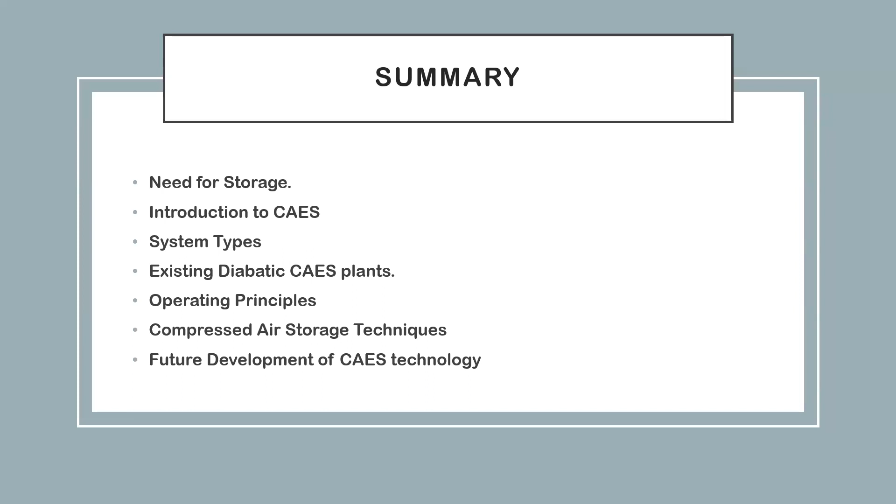We just mentioned the essential things about the concept of compressed air energy storage, its types and technology. So first, we will talk about the need for storage. We know that there is economical growth, and in order to keep this growth without affecting the environment, we need to search for solutions, either reducing consumption, increasing efficiency of the energy already used, or switching to clean energy.

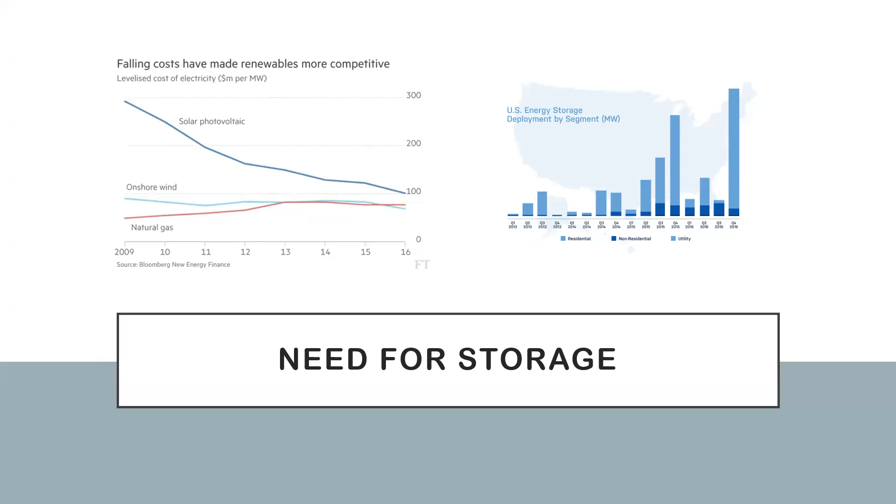And this clean energy is intermittent. The renewable energy solutions are intermittent, so we need to combine energy storage with them in order to have stable energy when there is demand. A lot of energy storage techniques are available: batteries, different types of batteries, pumped hydro storage, compressed air, which is our topic for today, flow batteries, and supercapacitors, which is a hot topic for research today.

Okay, first we passed this slide. Why storage? Why do we need storage? First, because it provides electricity at short notice, so it has a fast response for the energy need. Instead of waiting for other sources to provide electricity, we can control the frequency using the storage. We can use peak shaving and something called the black start effect. It's related to load management and reducing the fluctuation of the load.

For sure, overcoming the intermittent nature of renewable sources, and it's backup power for emergency. So what's compressed air energy storage? It's a technology that works like all thermodynamic cycles, by using compressors to compress air and then expansion in the turbine, using a heat sink and heat source.

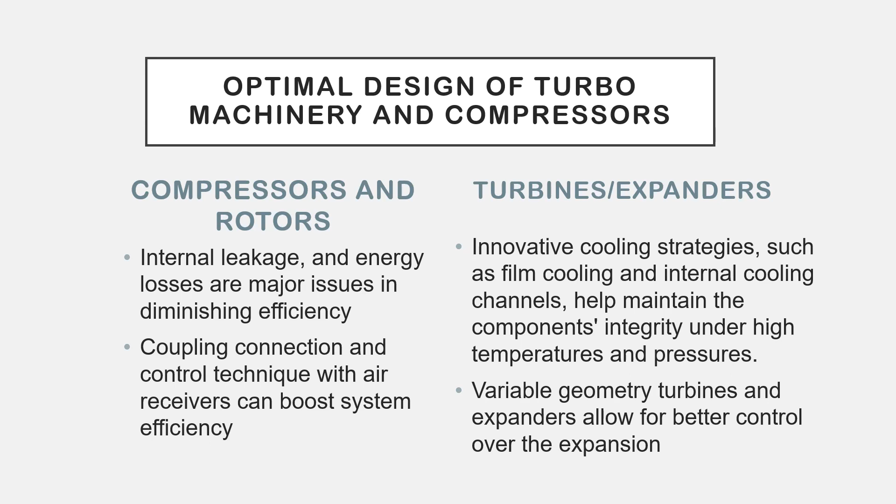Now, for turbines and expanders, there are advanced cooling techniques, which is the second slide. Research may focus on novel cooling methods to manage the high temperatures generated during expansion, improving overall system efficiency. Also, we can use variable geometry expanders, which allow for optimization under varying load conditions and operating parameters. And that's it for rotors and expanders.

Okay, another technique that can improve the efficiency of the compressed air energy storage is dealing with the thermal energy storage. We know that during the heat recovery and heat exchange, a lot of heat will be lost, and the process is not ideal or isentropic. So a solution that we can suggest here is to use the PCM, the phase change material. Maybe we didn't study this process, it's just a suggestion, inside the tanks. So when heat enters with very high pressure and temperature, this material will store the heat and give it again to the air before the expansion process. This will increase the efficiency, as approximately 92 to 93% of the heat will be delivered and exchanged through the air. And we can for sure use other techniques, like the types of rocks where the air will be stored, depending on the physical and chemical properties of the material.

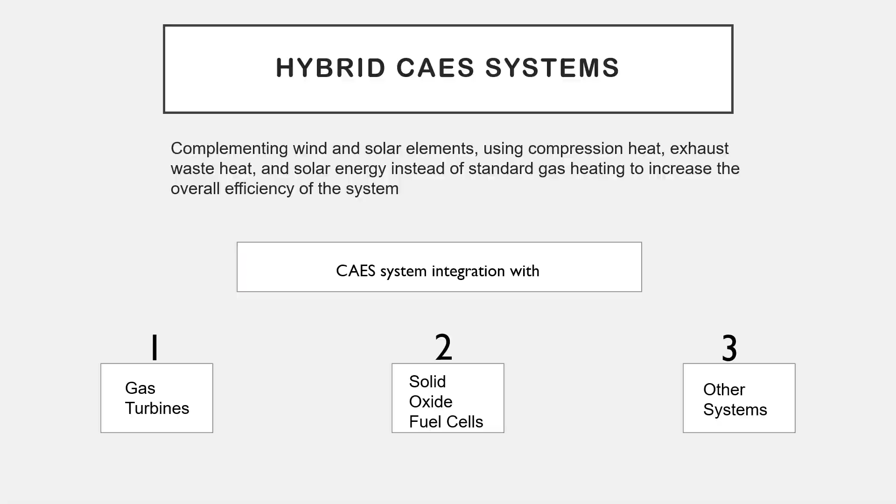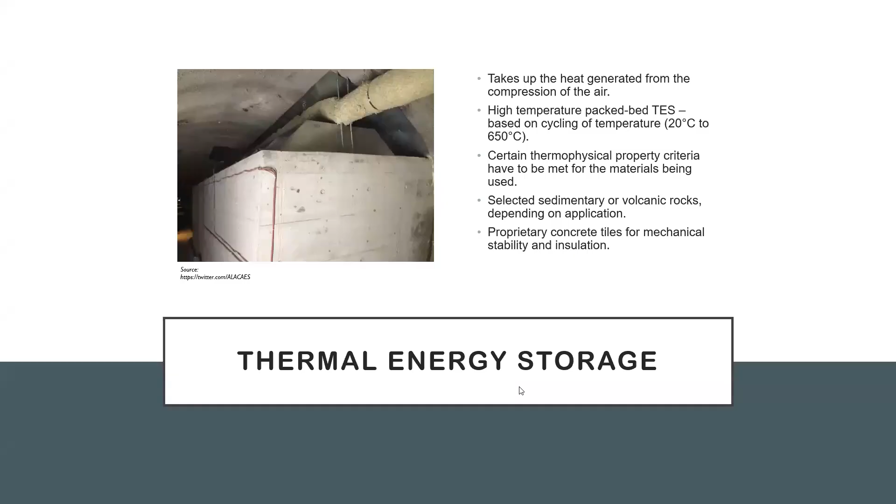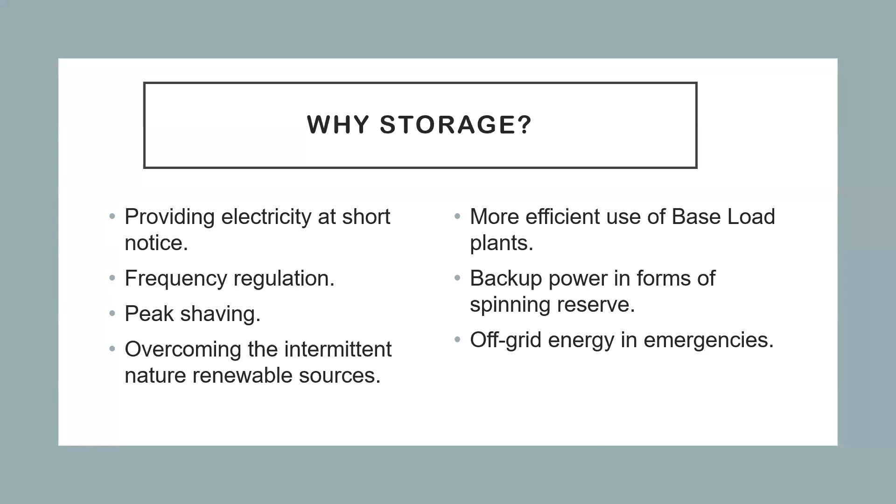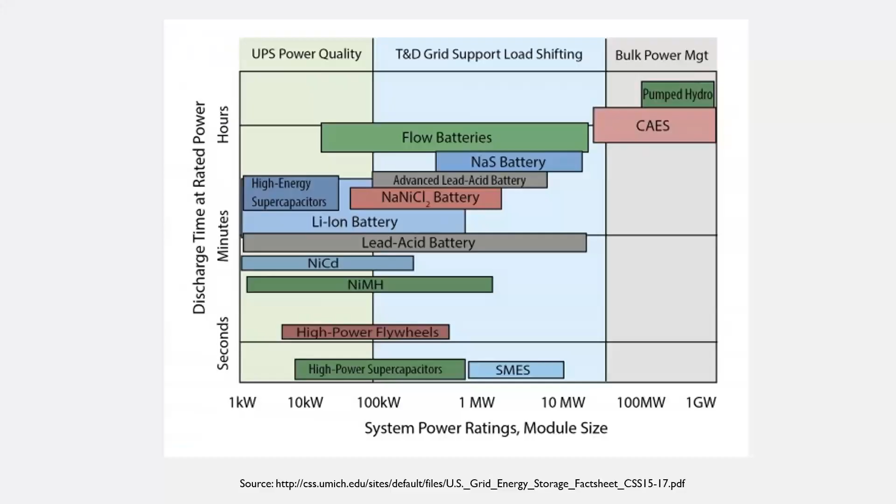Okay, thank you, Omar, for your presentation. Do you hear me? Yes, I can hear you, Doctor, and Ryan also. Okay, Omar, great. Can you go back with the slides, please? Yes, okay, for sure. Here? No, I will let you know where to stop. Go down, please. I'm on the cover page. Oh, yeah, go down, please. Okay. Okay, stop. Previous slide, please.

Okay, Ryan, please give me more details about this cycle and explain in detail all the different steps that we have. Yes, of course. So when we compress air, we can avail from the fact that there will be more pressure. And this pressure, this energy, we can use it. How could we use it? By directing this energy into turbines. When we direct this energy into turbines, we can generate electricity. But this isn't as easy as said as it is done. There are several more processes we could use, as we learned from previous mechanical courses and previous cycles. We need to add heat so that it becomes more efficient. And as we add more heat, we also need to take away heat from condensers and several machines. And this is my explanation.

Do you need anything else? Can you give more details about why we use the intercooler, the aftercooler, and why we use two levels of turbines and two levels of compressors? Two levels because we can boost efficiency more. So the intercoolers are for the low and high pressure compressors, rather than in the TS diagram or other graphs. They are split into two, and this way we could be more efficient. And the same applies for the turbines. From the exhaust heat, we can use this heat to heat our compressed air. So this is all just to boost efficiency.

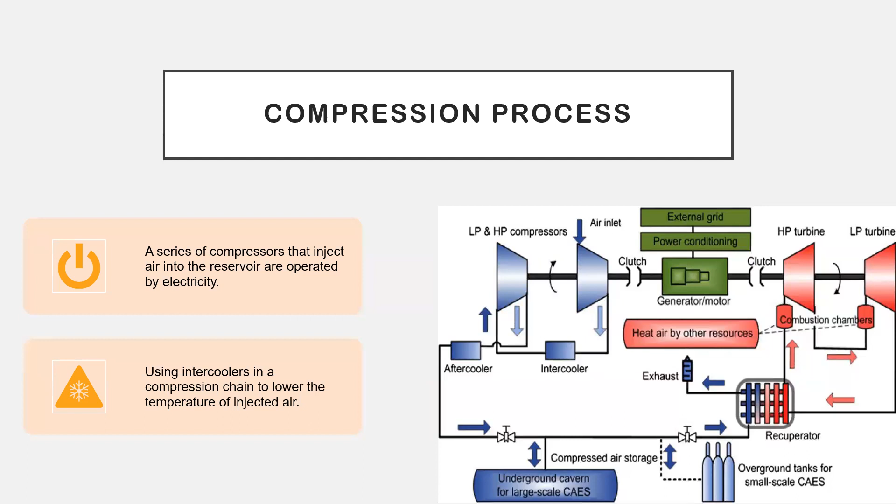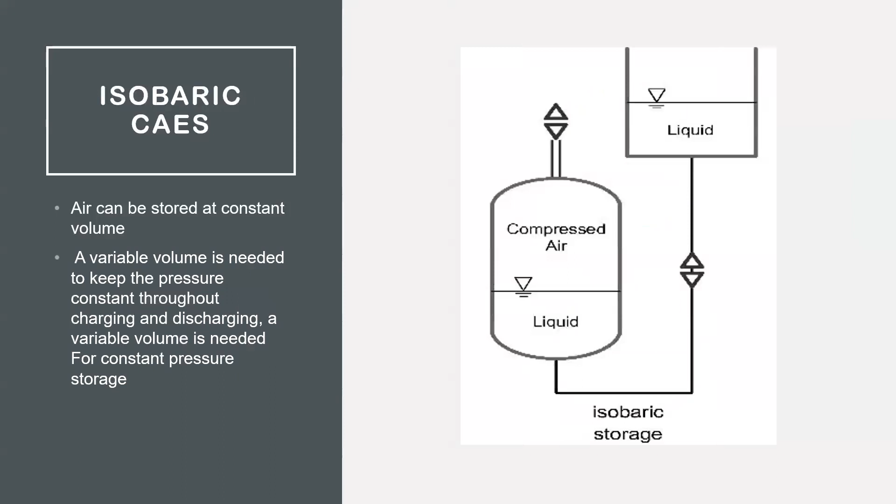Okay, thank you, Ryan. Omar, can you go down, please, with the slides? Yes, Doctor, for sure. Okay, Omar, yes. Please give more details about this cycle and its operation.

Okay, this cycle works like all the compressed air energy storage cycles. First, we have the air extracted from the atmosphere. It goes to the first compressor and is compressed, and here there is something called a heat regenerator. It passes through it and is cooled a bit. And here we can spray liquid. Usually they use liquid nitrogen or water.

And there is another compressor here just before the tank, in order to recompress the air again after mixing it with the fluid. It could be done in two stages or three stages. It is mentioned in the report, depending on the temperature of the air and its pressure and the ambient conditions around it. Then it will go to the tank.

When we need to use the energy, this B here is a blower. This blower is used during the expansion. So when we need this air again, it will be pumped because it is liquid. It will pass again through the regenerator, and it will lose the water or the fluid. The concentration will decrease, and the blower's mission is to deliver this liquid outside the regenerator. Actually, I didn't go into the design of the regenerator. Then the dry air goes to the combustor, where we can apply liquefied natural gas for the combustion, and it will then go to the turbine, where we use the regenerator heat again before delivering it to the atmosphere. And the cycle will repeat again.

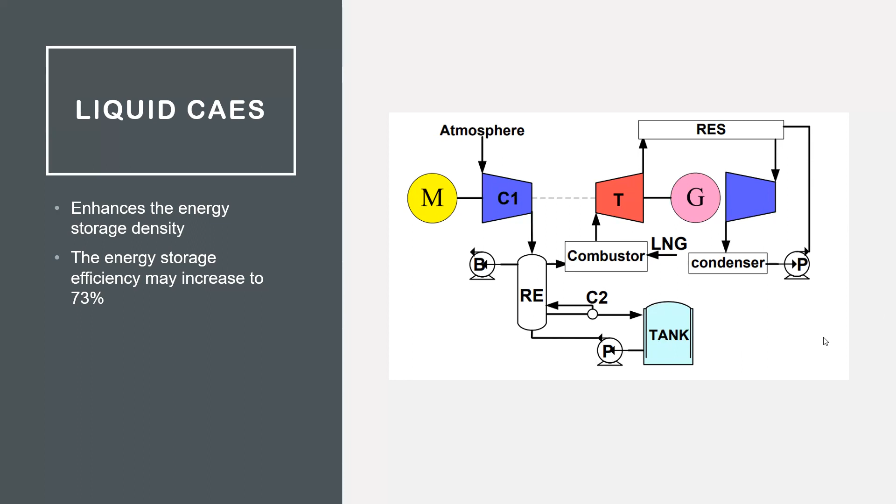This part is the continuation of this part here. Okay, Omar, thank you. Please, next slide. Yes. Ryan, please elaborate more on this cycle. Ryan, do you hear me? Yes, yes. So here we are using liquid,

and as we heat the liquid, it can provide more energy. From this energy, we can provide more pressure, and in this way, we can provide more work. It seems difficult or complex, this process, but as I said, this is what happens.

Ryan, you gave an overall explanation, but what about the different components of the system? What is the function of each of these parts? So to store the liquid, we need a tank, but this liquid shouldn't be contaminated. So there's a contaminant also. And there are several valves to regulate the liquid and the gases after the liquid is heated. Also, there are compressors, and heat is rejected to the atmosphere. And yes, that's it.

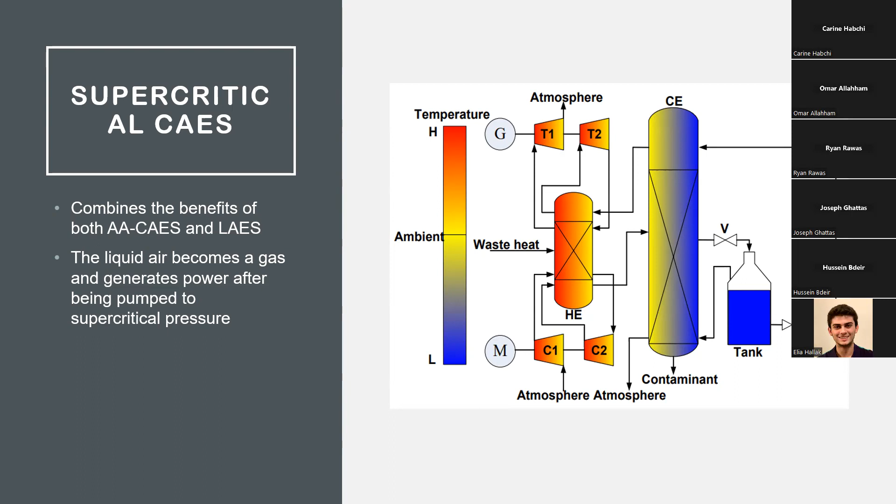Omar, can you elaborate more, please? Okay, Doctor, I will describe the system. Here we also have two compression stages, low and high. Here the air is compressed and goes to the heat exchanger. Then the air will be compressed again, the same as in the liquid air compressed energy storage, also in two or three stages. It depends on the ambient conditions before being introduced into the heat exchanger again, where this device will store the heat from the air.

And the air will be introduced into the contaminant here, and this tank is an expansion tank. Actually, this is a valve here because we are storing the air at very high pressure. It's the supercritical pressure, and some of the contaminant from this side will be released to the atmosphere. When we need this air, it will go from this side, and again it will regain the heat released in the first stage before going to the turbine, and be reheated again before going to the second turbine, and then generate electricity and deliver to the atmosphere from turbine number 1, which is the low pressure turbine.

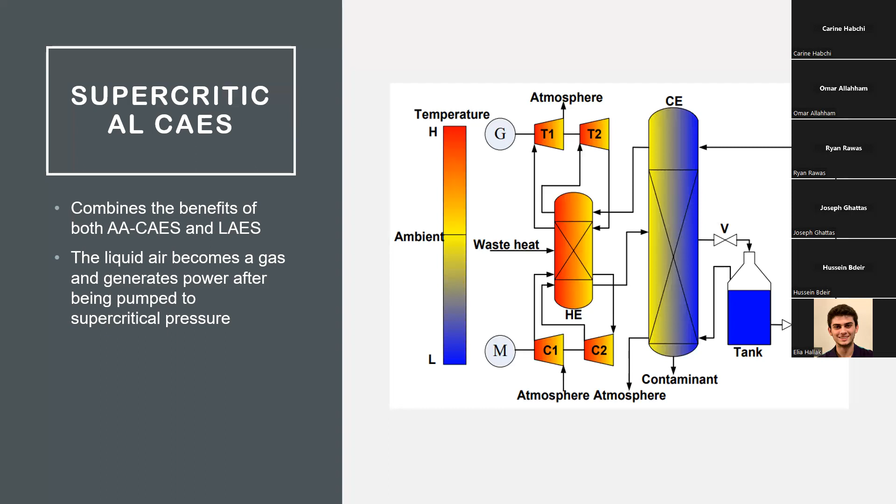Okay, thank you. Can you move down, please, with the slides? Yes.

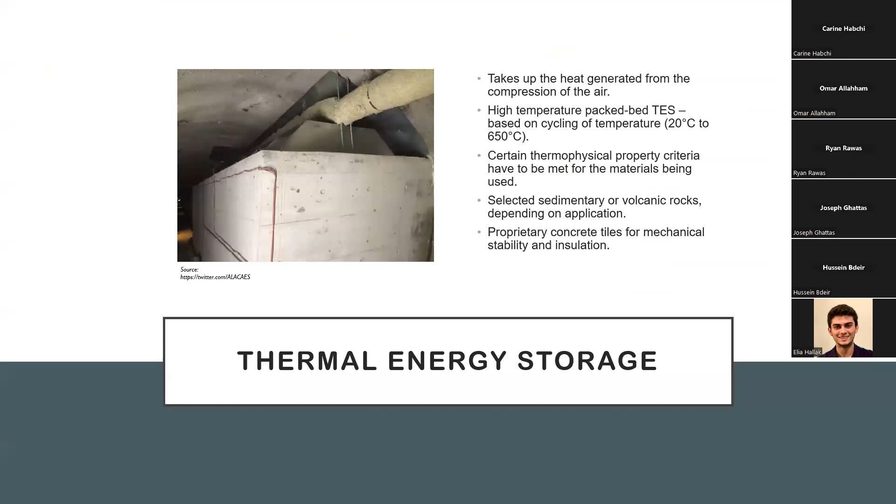You talked about implementing renewable energy. Ryan, can you comment more, please, on how we can implement renewable energy and how efficient it was with these cycles of air compression?

As we know, Omar and I found out that compressed air energy storage systems alone aren't that efficient. It is more efficient when we combine it with other systems. That is, we can use solar energy. For instance, in some systems we need to heat the gas more, and how could we heat it more efficiently than with the sun's rays? So from the solar, we could extract the heat and heat the gas more. In this way, it becomes more efficient and we could produce better electricity.

Also, there is the matter of supply and demand and energy density. At low peaks, we could store the air. And at high peaks, when energy is expensive, we could use this air that we stored at lower cost, together with the solar energy, and produce electricity.

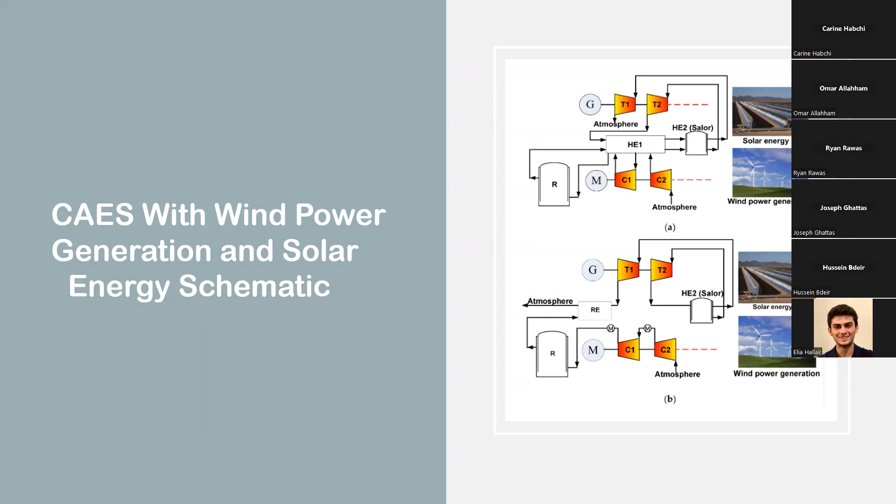I want to highlight the importance of such a project in the course, because in this presentation we incorporated several cycles that we have already studied together in compressed air storage. Plus we can introduce from this project the use of renewable energy, because our next step will define first the use of fossil fuels. If we need to provide heat, one of the possible sources is fossil fuels. This is why the chapter that we'll tackle now covers fossil fuels, their characteristics, how we can use them, and what their disadvantages are, so we can understand why we shift towards renewable energy.

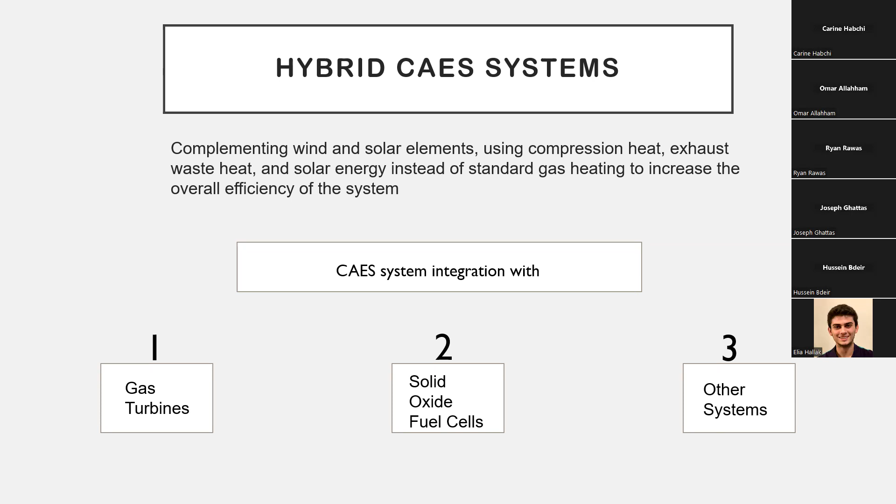In this project, we have seen that renewable energy can be implemented in the compression of air. So we can use solar energy, we can use wind energy, and in next chapters we'll define hydropower. All of these sources can be used in any thermodynamic cycle. We can implement renewable energy to increase its efficiency. So we can consider that any of the projects you are doing now incorporates the whole material, from the thermodynamic cycles to the strategies to enhance efficiency, to the use of renewable energy systems instead of fossil fuels, in order to reduce greenhouse gas emissions and the bad effects of fossil fuels.

Omar and Ryan, the project is great, but what is missing mainly is an economic study of such systems: whether it is economically viable to implement them compared to other strategies, what their status is, etc. So I advise any